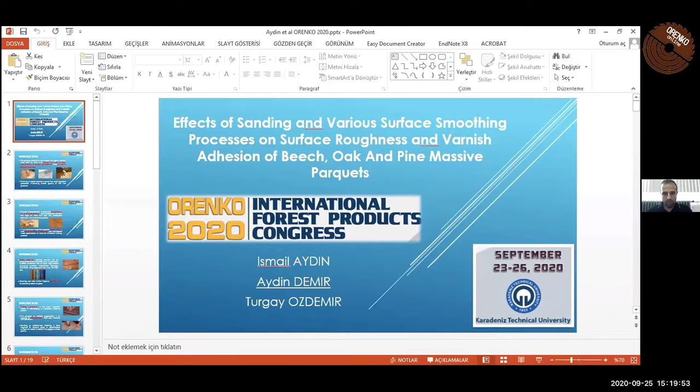Okay. Good afternoon, everybody. My topic is the effects of sanding and various surface smoothing processes on surface roughness and varnish adhesion of beech, oak, and pine massive parquets. The primary function of any wood finish, paint, varnish, wax, stain, etc. is to protect the wood surface and maintain a certain appearance and provide a cleanable surface.

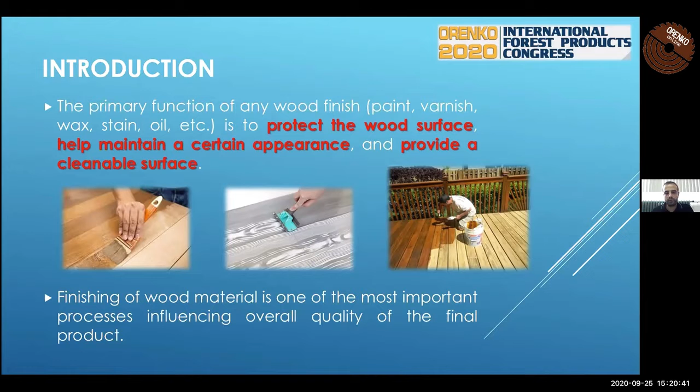Finishing of wood material is one of the most important processes influencing overall quality of the final product. Physical characteristics, in particular appearance of the finished product, are affected by not only the type of finish but also the interaction between finish and the substrate. It is a well-known fact that species, wood density, and roughness of the substrate are considered major parameters to have an effective finishing process.

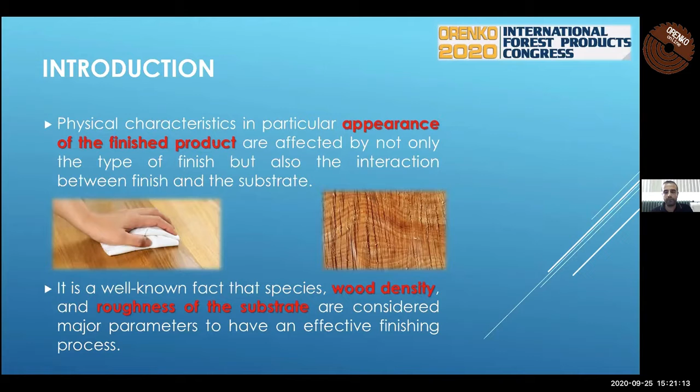Wood coatings prolong service life by safeguarding the substrate from, in particular, outdoor conditions like UV light, high and or changing humidity, mechanical damage, chemicals, living organisms like fungi, termites, etc. Coatings can also further improve aesthetics by providing color or gloss.

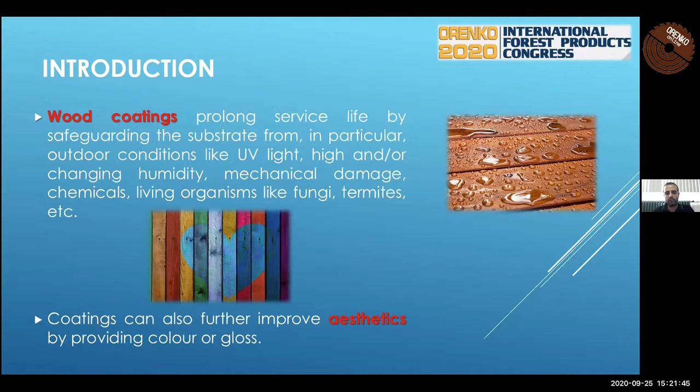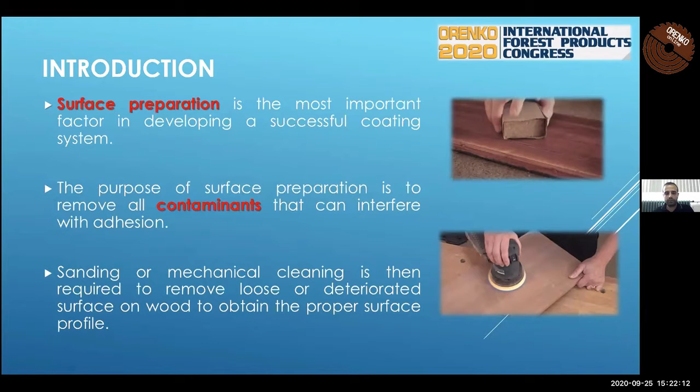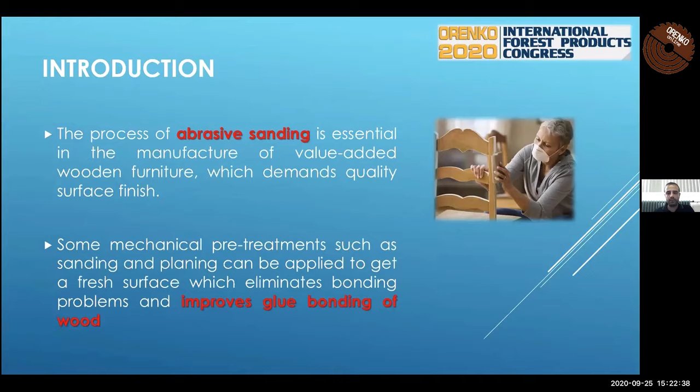Surface preparation is the most important factor in developing a successful coating system. The purpose of surface preparation is to remove all contaminants that can interfere with adhesion. Sanding or mechanical cleaning is then required to remove loose or deteriorated surface on wood to obtain proper surface profile. The process of abrasive sanding is essential in the manufacture of value-added wooden furniture which demands quality surface finish. Some mechanical pre-treatments such as sanding and planing can be applied to get a fresh surface which eliminates bonding problems and improves glue bonding of wood.

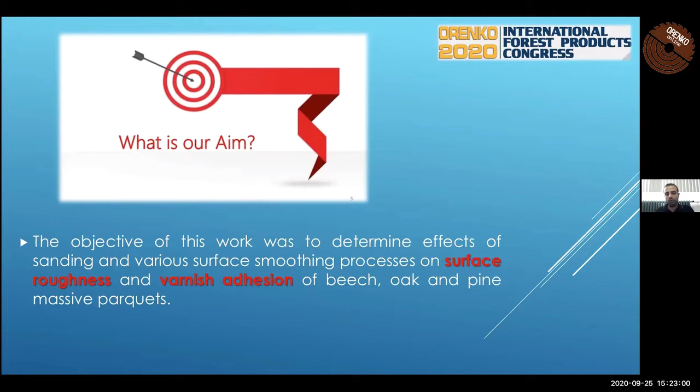What is our aim? The objective of this work was to determine effects of sanding and various surface smoothing processes on surface roughness and varnish adhesion of beech, oak, and pine massive parquets. Materials and methods: beech, pine, and oak massive parquets with the dimensions 5 cm, 1.8 cm were obtained from a commercial parquet located in the Karadeniz region in Turkey.

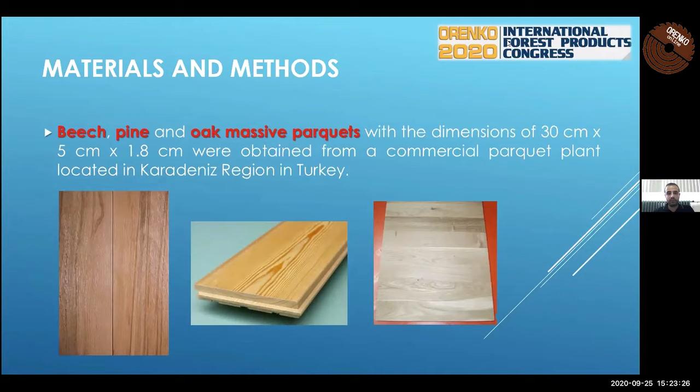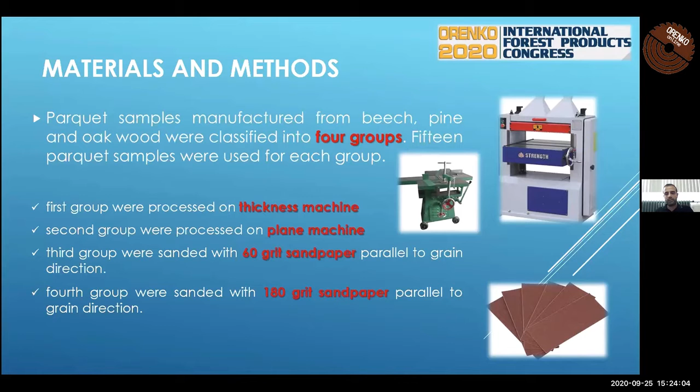Parquet samples manufactured from beech, pine, and oak wood were classified into 4 groups. 15 parquet samples were used for each group. The first group was processed on a thickness machine. The second group was processed on a plane machine. The third group was sanded with 60 grit sandpaper parallel to the grain direction. The fourth group was sanded with 180 grit sandpaper parallel to the grain direction.

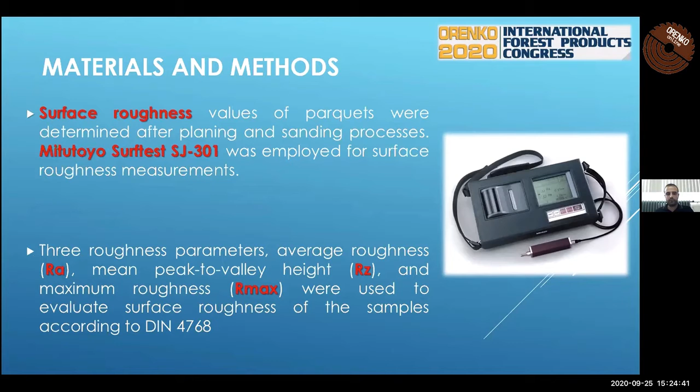Surface roughness values of parquets were determined after planing and sanding processes. A Mitutoyo Surftest SJ-301 was employed for surface roughness measurement. The roughness parameters average roughness, mean peak to valley height, and maximum roughness were used to evaluate surface roughness of the samples according to DIN 4768.

After surface roughness measurements, parquet samples were coated with cellulosic varnish by using a spray gun at the spread rate of 120 g/m². The coating was applied to the surface as two bases and one top layer. The mixture of cellulosic varnish for each layer had 100 parts varnish and 50 parts thinner by volume.

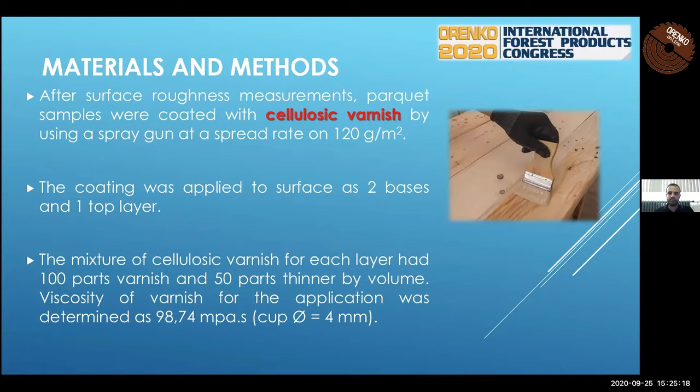Once parquet samples were dried at ambient temperature after the coating process, dry film thickness of samples was measured by using an Erichsen PIG 445 measuring device at an accuracy of 1 micrometer according to ASTM D4138. Average dry film thickness of cellulosic varnish was measured at 80 micrometers.

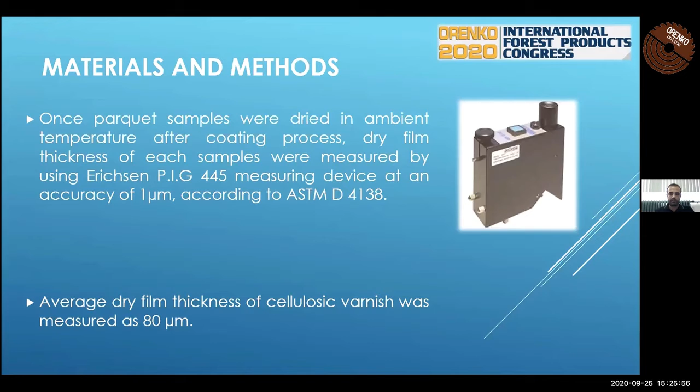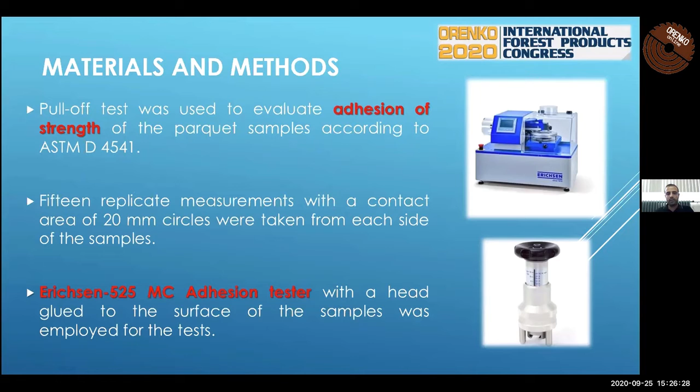The pull-off test was used to evaluate adhesion strength of the parquet samples according to ASTM D4541. 15 replicate measurements with a contact area of 20 millimeter circles were taken from each side of the sample. An Erichsen 525 MC adhesion tester was employed for the test.

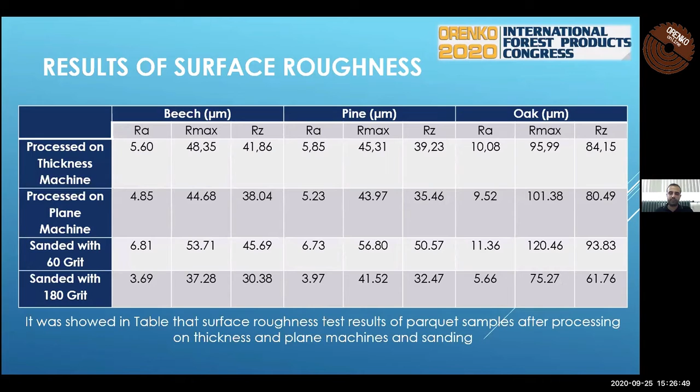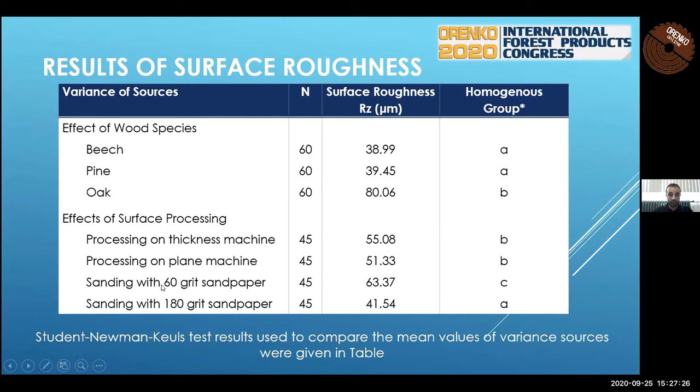Results: the surface roughness results of parquet samples after processing on thickness and plane machines and sanding were shown in the table. You can see oak parquets gave the highest surface roughness mean values due to the most porous anatomical structure, having the roughest surface. The smoothest samples were obtained after sanding with 180 grit sandpaper for the parquet wood species; with 60 grit sandpaper sanding the highest values were obtained.

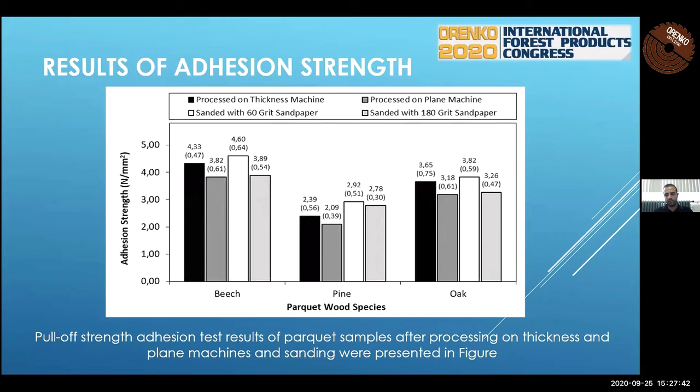You can see the pull-off adhesion strength test results of parquet samples after processing on thickness and plane machine and sanding presented in the figure. Adhesion strength values of beech parquets with cellulosic varnish were found higher than the oak and pine parquets. The adhesion strength of varnish on wood surface has been reported to be higher in wood from angiosperm trees compared to gymnosperms. The smooth surface quality of beech may be responsible for this finding.

The highest adhesion strength values were obtained with 60 grit sandpaper. It has been reported that increased surface roughness leads to increased varnish layer adhesion strength due to a mechanical and chemical bond between the wood sample and varnish liquid when applied to its surface.

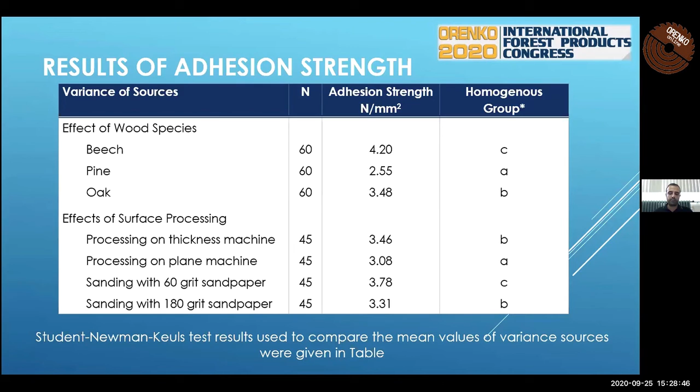Conclusions: the highest surface roughness values were obtained in oak, and there was no statistical difference between beech and pine. The adhesion strength values of beech parquets were higher than pine and oak parquets. Sanding with lower grit sandpaper results in increased surface roughness with improved adhesion strength between the coating and the substrate. Therefore, it is recommended that where high varnish adhesion strength is required, the wood surface should be sanded with low grit number sandpaper.